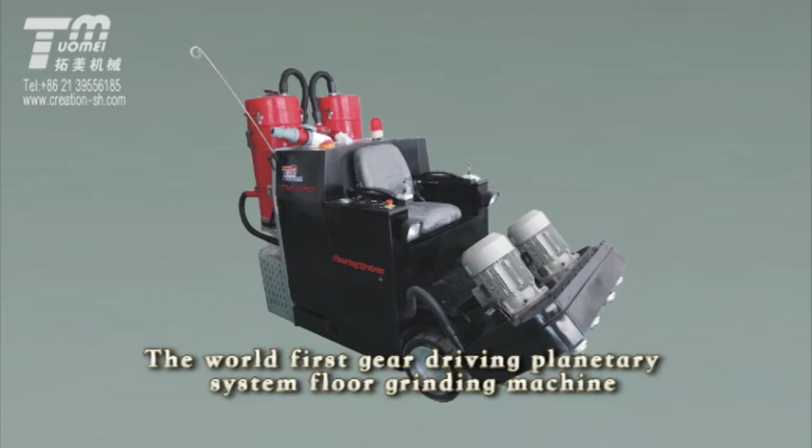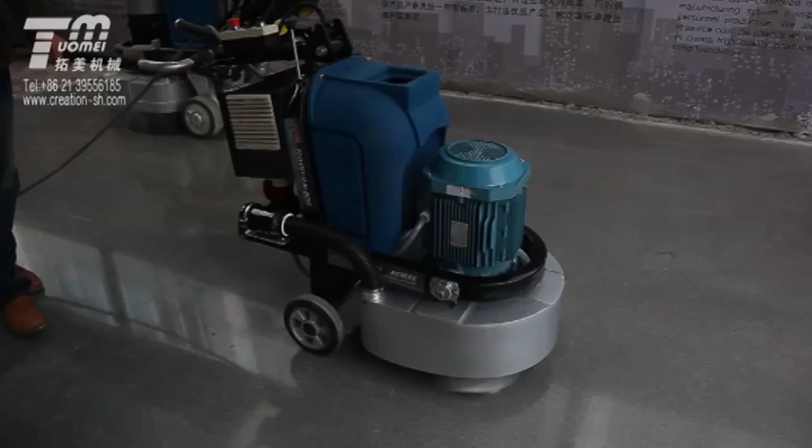The world's first gear-driving planetary system floor grinding machine launched at the end of the 20th century, applying a full handmade gear driving system to change the single belt driving situation in floor grinding machine history. This creative design brought world-shaking changes for global floor grinding machines.

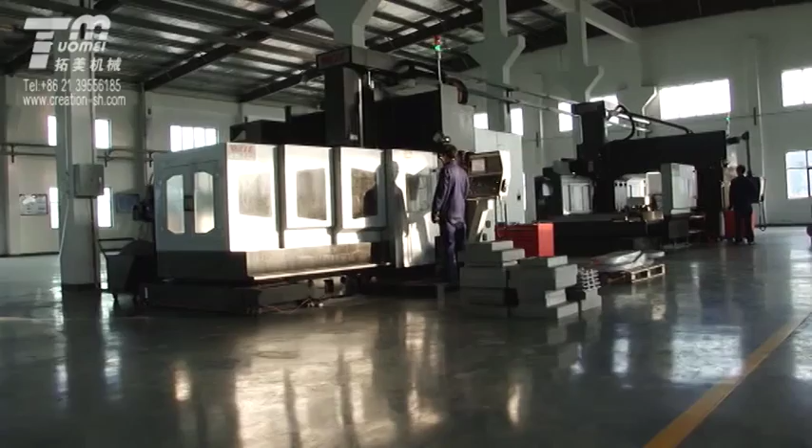This also brought out a new, most competitive company, Shanghai TUOMEI Machinery, which established its top position in the international industry. Ten years of difficulties and hardships made Shanghai TUOMEI a strong modernized enterprise integrating production, sales, product research, and development, import and export.

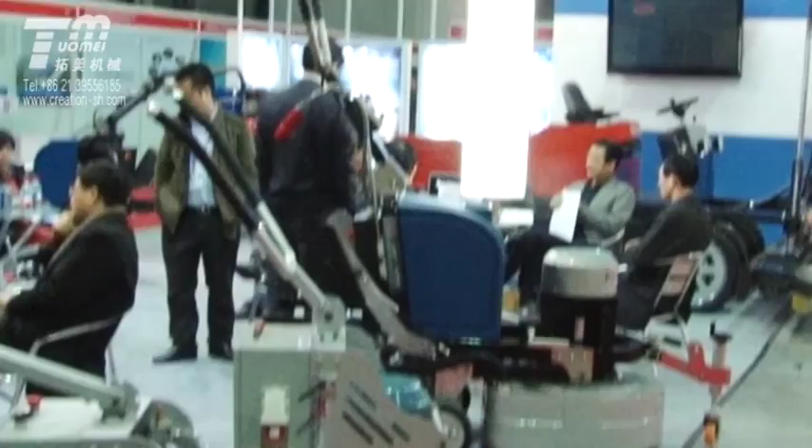In 2010, Creation Machine, a professional floor machine manufacturer in America, strategically cooperated with TUOMEI Machinery by introducing advanced laser concrete screeding machines and laser concrete grinding machines. Shanghai TUOMEI is the first company to perfect system equipment in this industry.

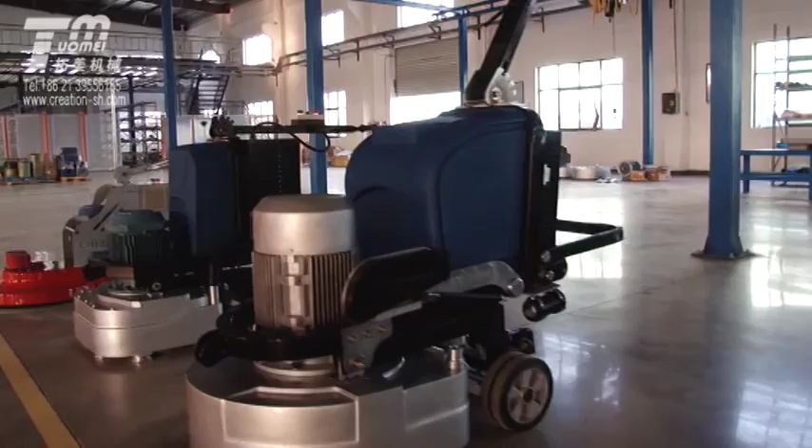We set up two manufacturing bases in China, occupying 30,000 square meters of space. The production capacity is one of the three largest among global manufacturers. TUOMEI reaches 60% of the industrial flooring market and 65% of the high-end stone flooring market, giving it the leading manufacturing level in China's flooring industry.

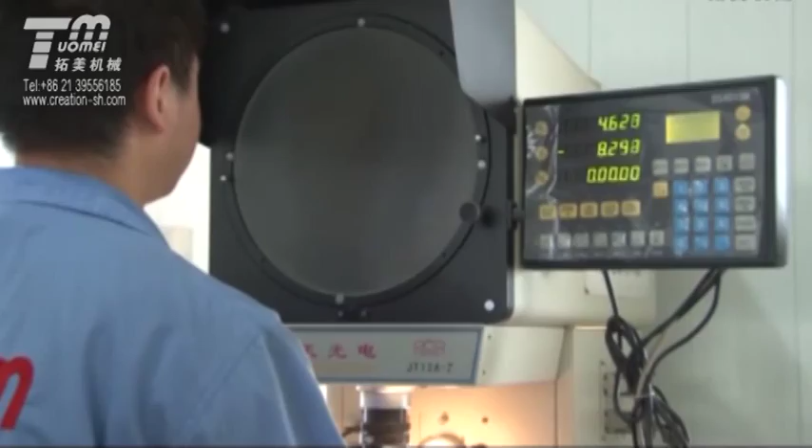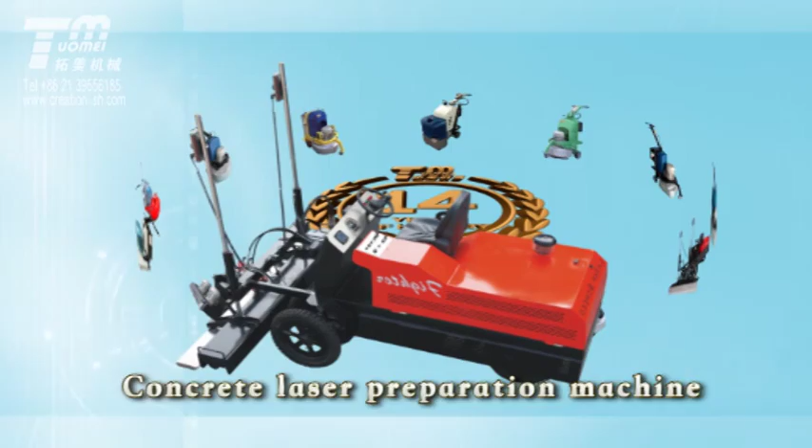We are the first to introduce high-tech process equipment from abroad and adopt whole data-controlled manufacturing processes, as well as robot-based automatic manufacturing system manipulation, making great progress in non-personnel production. TUOMEI specializes in floor construction system machines, such as concrete laser preparation machines, concrete laser grinding machines, concrete laser cutting machines, telecontrol and hand-control grinding machines, and industrial vacuum cleaners.

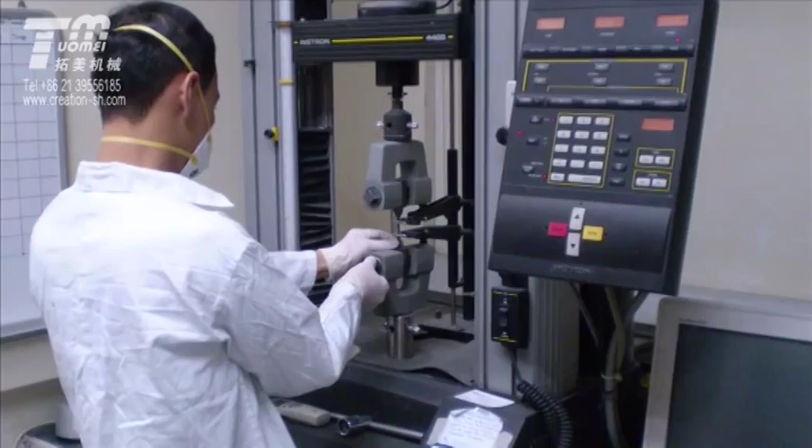Leading industry development, displaying Chinese creativity, TUOMEI undertakes the mission to promote the manufacturing level for Chinese floor equipment and product development. It is our consistent pursuit to establish a top brand of international floor industry equipment in the world, relying on the enterprise's own ability to promote industrial development.

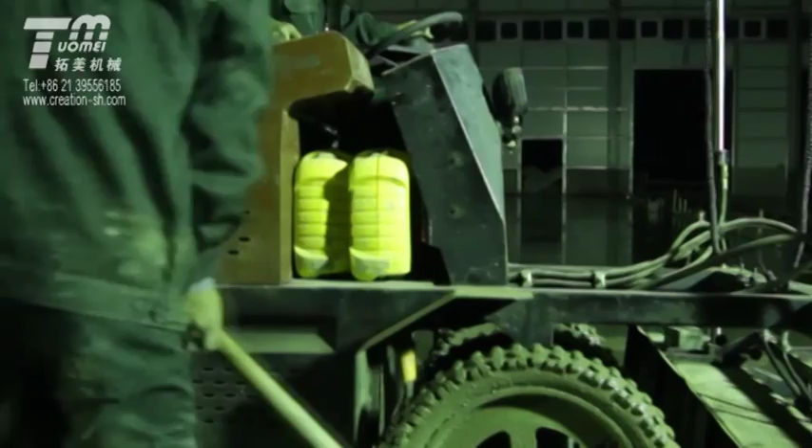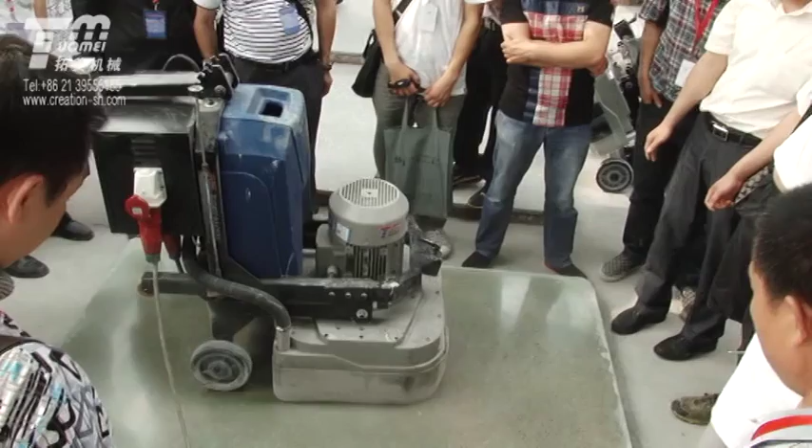Since its establishment, TUOMEI Company has focused on the overseas development of the latest equipment and related technology in this industry, according to the needs of industry at home and abroad. TUOMEI builds products and application technology to adapt to domestic and international markets.

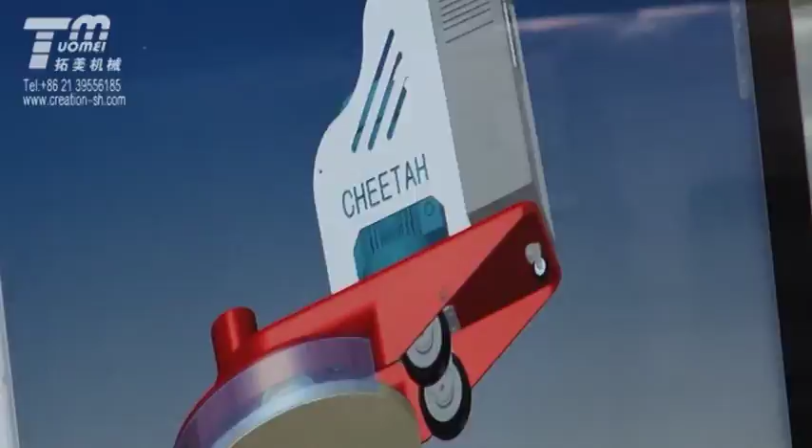TUOMEI Company not only focuses on the development of hardware facilities, but also pays more attention to industry application technology and culture popularization to guide the healthy and orderly development of the industry. Practical innovation provides customers with the most competitive equipment.

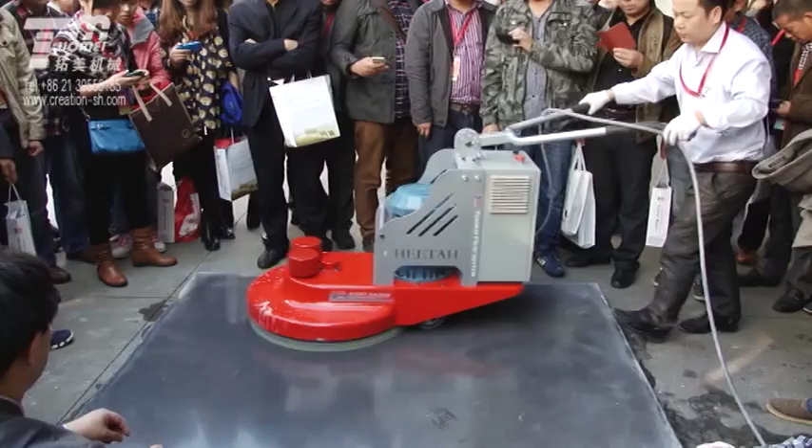Practicality and conscientiousness are the keys to our development. TUOMEI Company always pays attention to development tendencies, completes every basic research earnestly, makes every effort toward the reality of enterprise development, and conforms to an actual development mentality to serve true enterprise development.

After years of unremitting innovation, TUOMEI Company has successively gained many patents in this area, promoting our development unceasingly. TUOMEI effectively extends its flexibility to innovation, maintains the enterprise's vigor, and makes an innovation foundation to provide the most competitive equipment for customers.

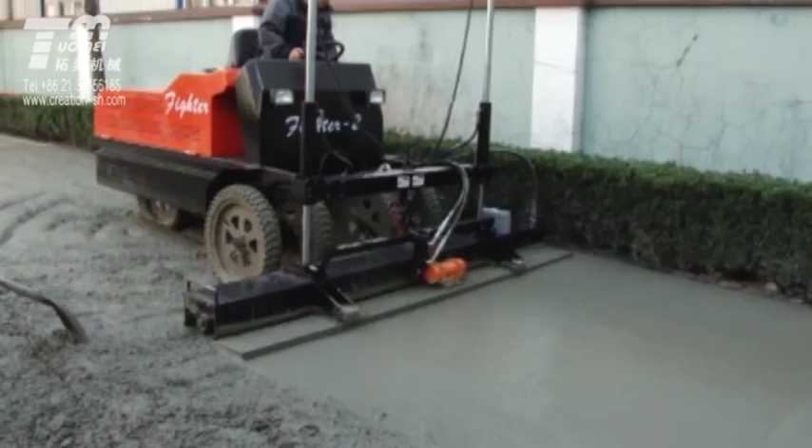Coexistence and co-prosperity with customers, challenging the world, creating the new future. On the basis of quality, TUOMEI Company is anxious for customers, thinking for customers, and working on product development and technology applications to make new contributions for customers.

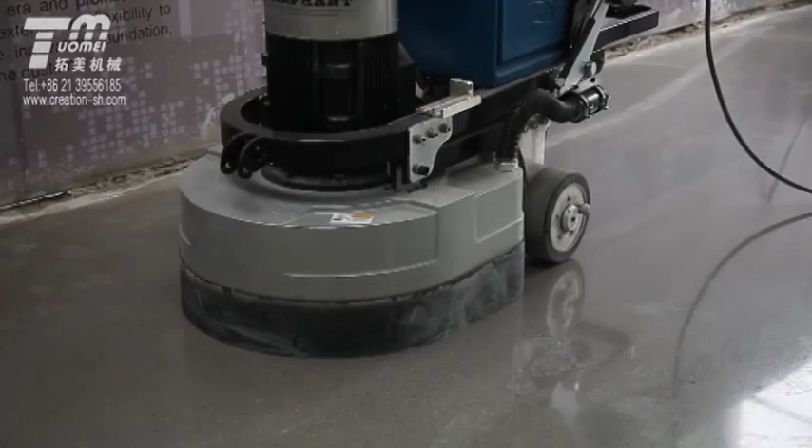TUOMEI Company makes great effort toward product intellectualization, integration, and high effectiveness led by scientific and technological innovation, to solve the bottleneck of industrial development and open up enough development space for customers.

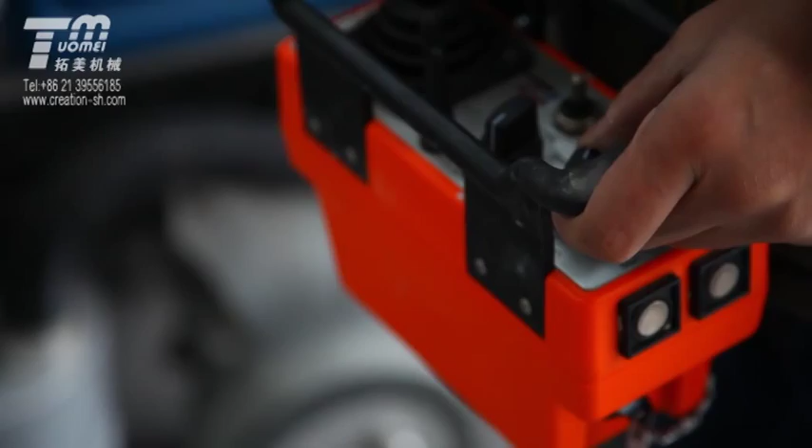Create an international brand with premium competitive production cost. Since its establishment, TUOMEI Company has strived to make products with a grand scale, the most advanced equipment, and the most complete specifications, adopting whole data-controlled manufacturing processes as well as robot automatic manufacturing system manipulation.

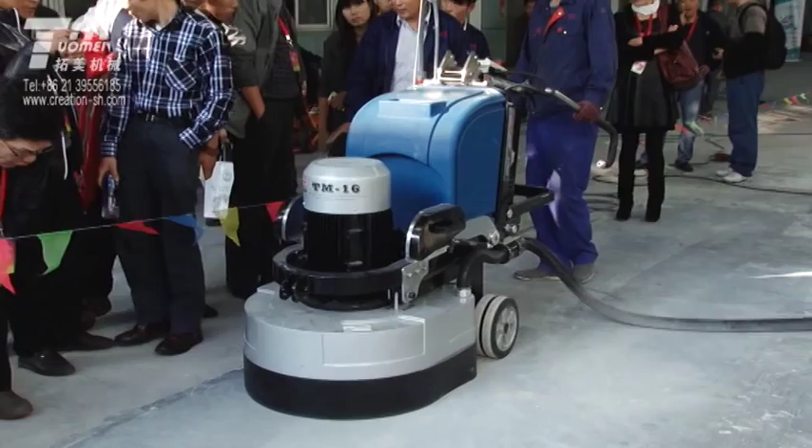This makes great progress in non-personnel production. We always maintain reasonable control of human resource costs, while ensuring product capacity and a unified control standard to create high-quality products and establish a top foundation for an international excellent brand. In the 21st century of economic globalization, with China's flooring industry development and culture, today the flooring industry is on the rise.

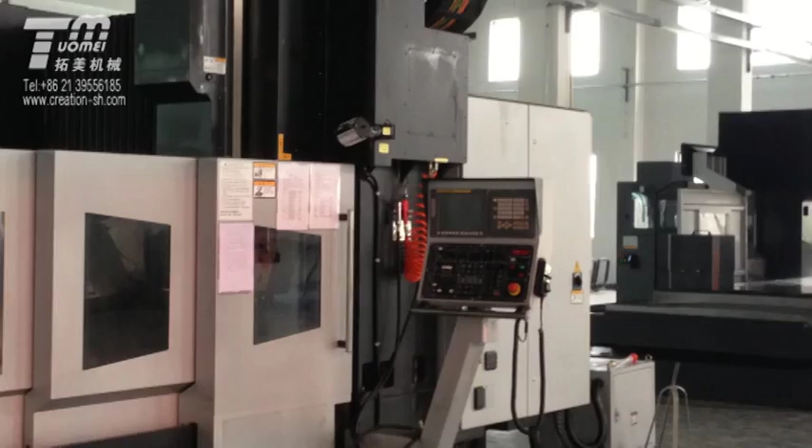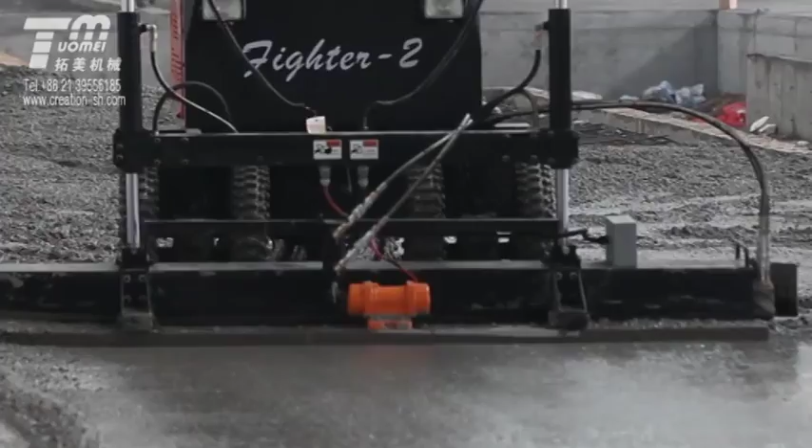The original traditional labor-intensive work method can no longer adapt to flooring industry development. The integration, high effectiveness, and intellectualization of machinery and equipment will become the mainstream of the times. In order to better meet market needs, we must introduce advanced technology and strengthen research and development to provide systematic floor preparation equipment.

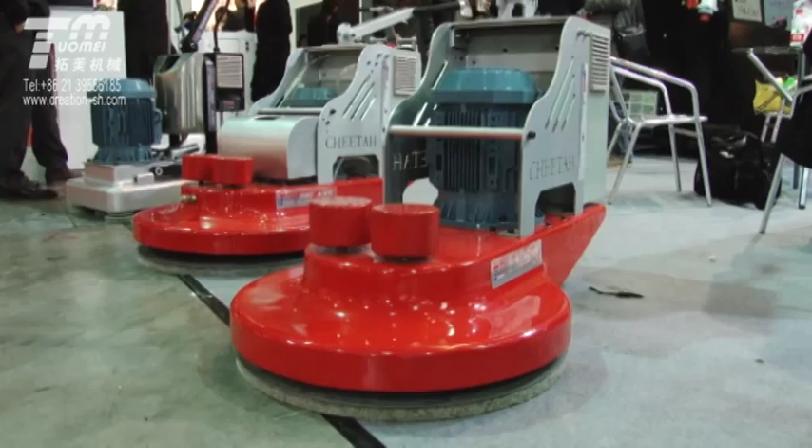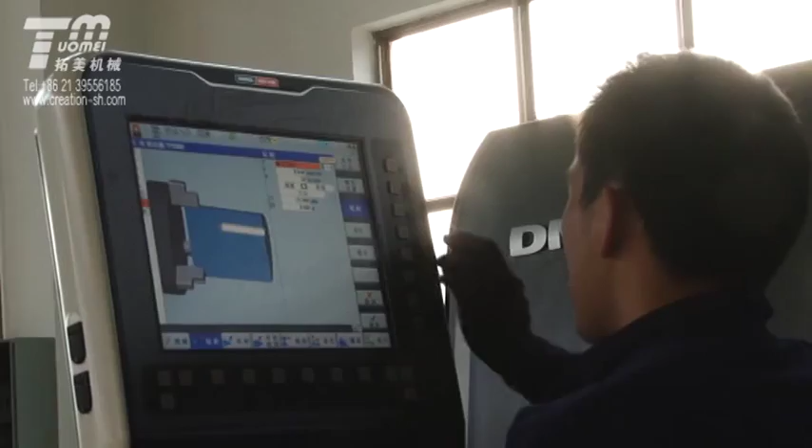In 2010, Creation Machine, a professional floor machine manufacturer in America, cooperated with TUOMEI company by introducing foreign advanced technology to form floor system equipment. TUOMEI company is established in Jiangsu, covering an area of 30,000 square meters of production base, providing enough space for domestic and international floor industry development.

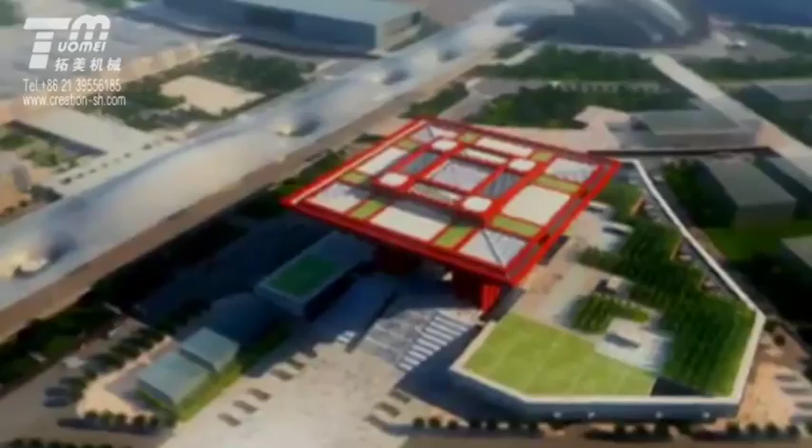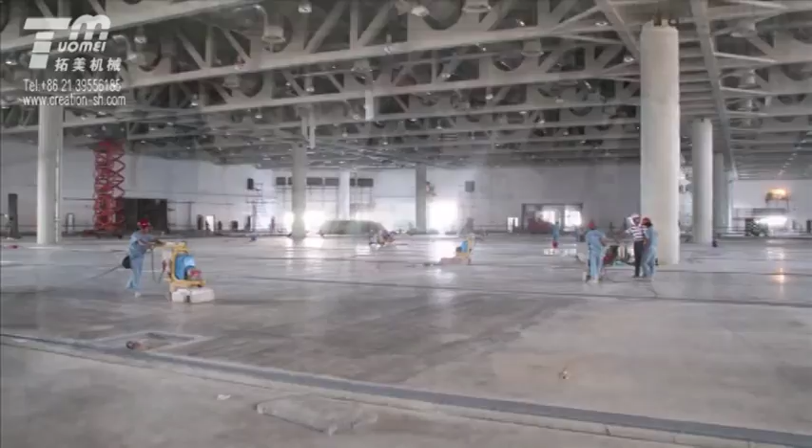During the construction of the Shanghai Expo, TUOMEI actively took part in the key construction project of the Expo China Pavilion, changing the old China Pavilion floor design scheme to fully show green and environmental modernist philosophy, and achieving concrete polishing floor strength, hardness, glossiness, and flatness up to top standards.

This brought a greater shake for the Chinese floor industry. TUOMEI floor construction perfectly supports the world floor construction level, guiding the Chinese floor construction level and highly holding a big banner for setting up floor industry standards.

The flatness of the high railway beam is the premise of guaranteeing train stable safety and rapid operation. High-precision beam flatness becomes an important target for high railway running speed and security.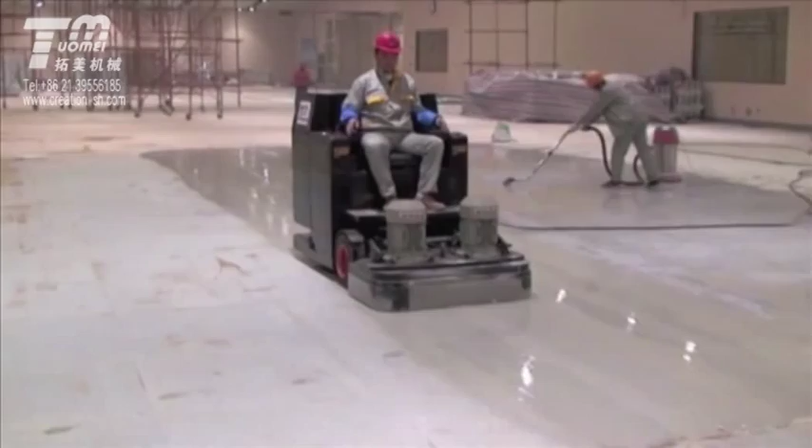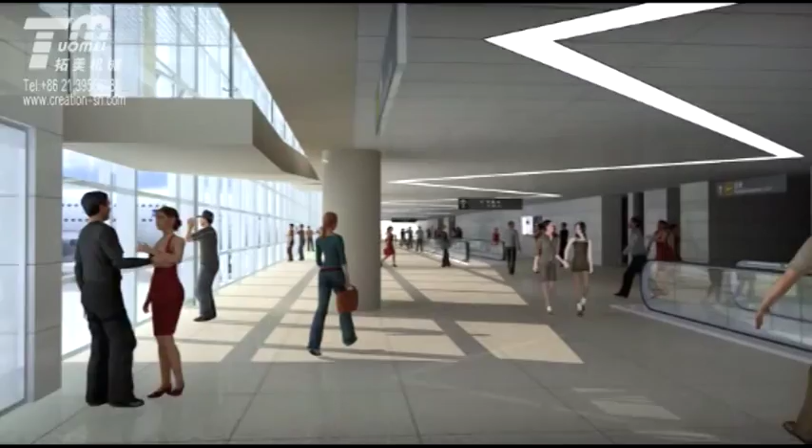Based on flatness standards, Shanghai TUOMEI introduced laser technology, developing a ride-on laser grinding machine, which runs a fantastic check to support a good basis for increasing train running speed. It satisfies the German 4-meter plus or minus 2-millimeter construction standard, solving the big problem of world high railway construction beam flatness, winning great praise from China high railway leaders and recognition from German experts.

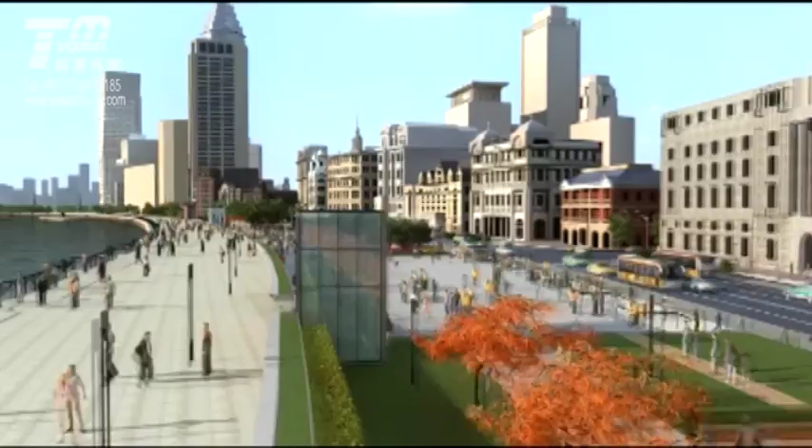TUOMEI never stops here. It keeps an all-day service philosophy to better serve high railway construction, writing a great chapter in China's high railway construction history. Chinese high railway construction supplies us a great platform for showing Chinese-made ability and creativity. High railway spirit also turns into the spirit of TUOMEI.

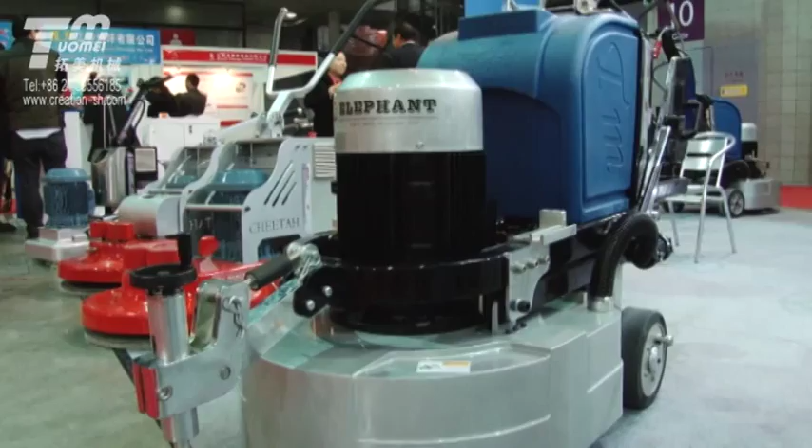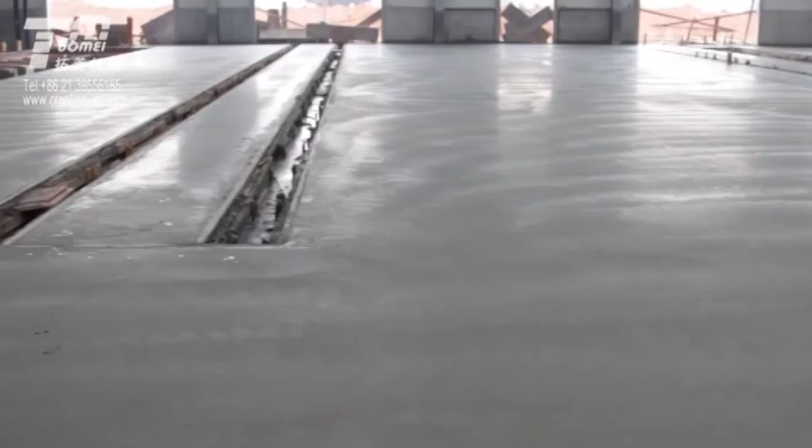During the last 10 years, the company has constantly upheld the service idea to go forward and backward along with customers, based on product quality and truth and honesty. We have adhered to the development road of technical innovation, constantly researching and applying new products and technologies, perfecting the industry chain and production management, to make our products the best.

We undertook the mission in the industry that we should promote industrial development by our own ability. It is our consistent pursuit to establish our brand of floor restoration machines in China. We believe we can go beyond ourselves. Only products made in China can conform to the global standard.

Mechanical equipment made in China will definitely surpass the foreign level to be the best in the world.